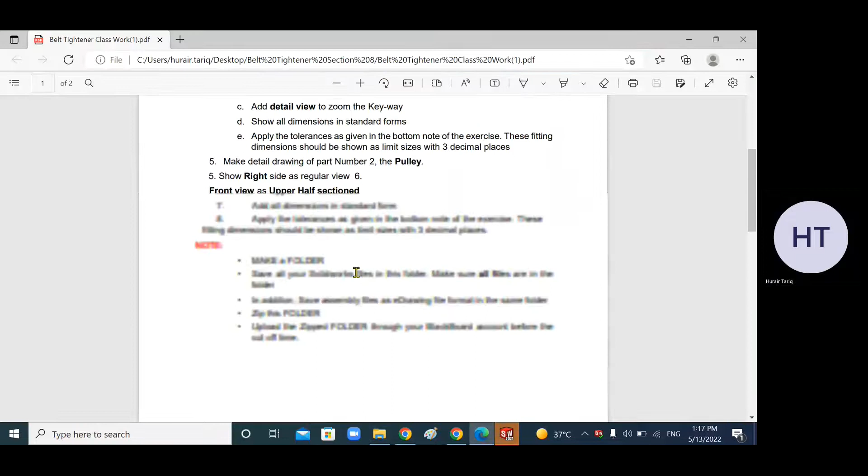Okay, so go to the assembly. Now, our part 1 is the frame. As you can see from here, this is part 1, which is the frame. So we want the frame to rotate about this bracket. So we do not want the frame to be fixed. Rather, we want the bracket to be fixed.

So this belt tightener is actually an assembly in which this frame rotates about the bracket. And when the bracket rotates, all the pins and everything are going to rotate with the bracket. This pulley is going to rotate as well. So we are going to bring this bracket first, because we want to make it fixed. Bracket is actually our part number 3.

So we are going to bring part number 3 first of all. So there it is, in SolidWorks. So go to the assembly now, browse.

You can go to assembly, insert component, browse, and we will go to the desktop, and we will come here to the desktop, to the belt tightener folder, and then over here we have this part number 3. We will bring this part first.

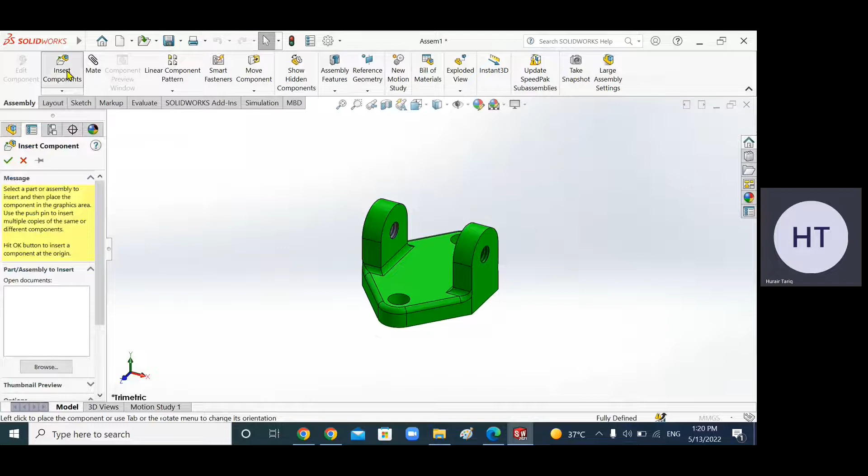So this was actually the first part. Now we are going to bring the rest of the parts in. So insert component and click on this part first: 1, 2, 4, 5, 6, 7, 8, and 9. Click open and bring all the parts one by one. This is first, this is second, this is third, this is fourth, this is fifth, this is sixth, seventh, eighth. Okay, all 8 parts are brought in.

Now we need 2 more, what is it called, 2 more pins, because we need 2 pins and 2 washers. So we are going to bring part number 6, which is the pin, and part number 4, which is the washer, again. Okay, this is part 4 and this is part 6.

The orientation is not correct anyway, but it doesn't matter, we will flip it when we do the assembly. Now we have to see how these things are joined together. First thing is that we are going to fix this wheel, this pulley, with this frame. Okay, you can start from anywhere you want, it depends on you.

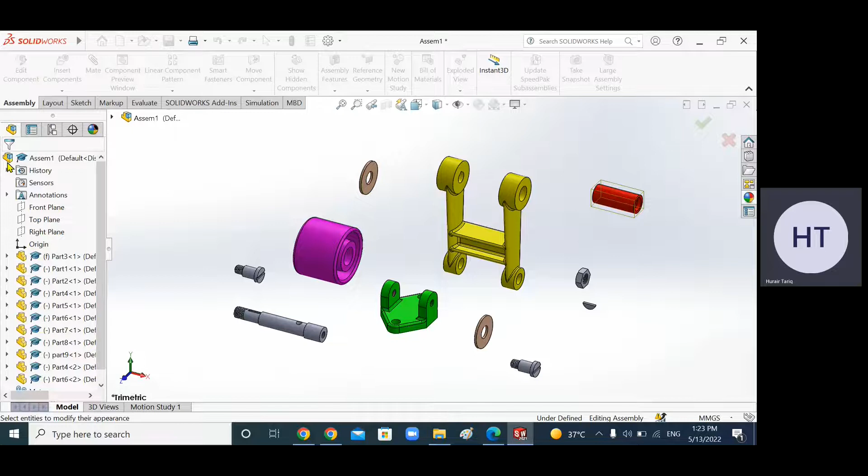Now what we'll do is bring this pulley over here, and we will click on mate, and we will click on this circle. Do not select the face, we do not want to select the face. Click on this circle and this circle over here and make it concentric. Okay, so this is concentric.

Do not lock the rotation, because the pulley is going to rotate with respect to the bushing. If there is a clearance fit between the pulley and the bushing, then you cannot lock the rotation.

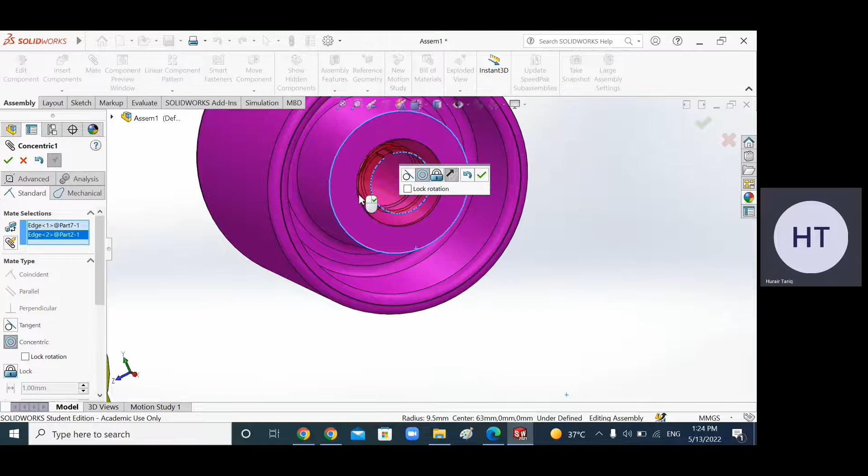If there is an interference between the pulley and the bushing, then you can lock it. But normally there is an interference fit between the pulley and the bushing, and you can see this is the oil channel. So over here you will have the interference fit. Normally we do have the interference fit here, and between the shaft and the bushing we have the clearance fit, so we can lock the rotation.

We can lock the rotation because we know that there is an interference fit between the pulley and the bushing, because there is no oil channel on the outside, but there is oil channel inside. So when you have an oil channel, this means that the two mating parts have got the clearance fit, not the interference fit.

So I have locked rotation, so it's not going to rotate. Click OK, but this can come out. This part can come out, as you can see. So what I have to do is apply another mate.

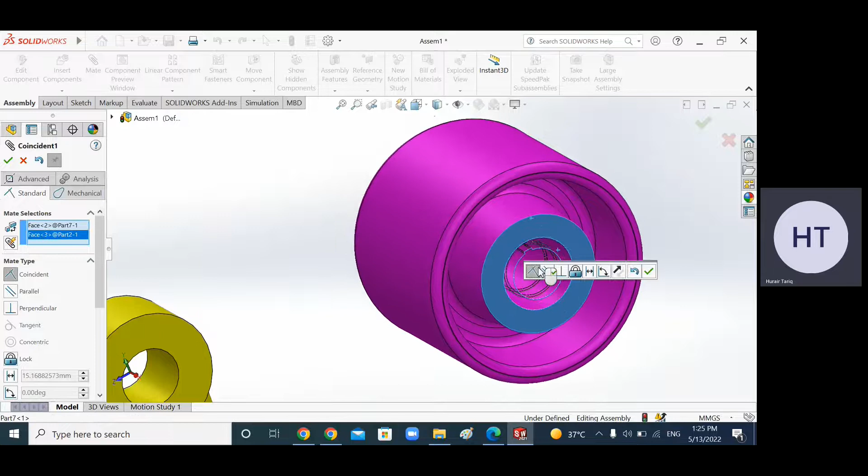I have to click on this surface and this surface, and I know that they both have the same depth - the depth of the bushing and the depth of the inside hole of the pulley are the same. So you can choose these two surfaces and make them coincident. Okay, so now this is done.

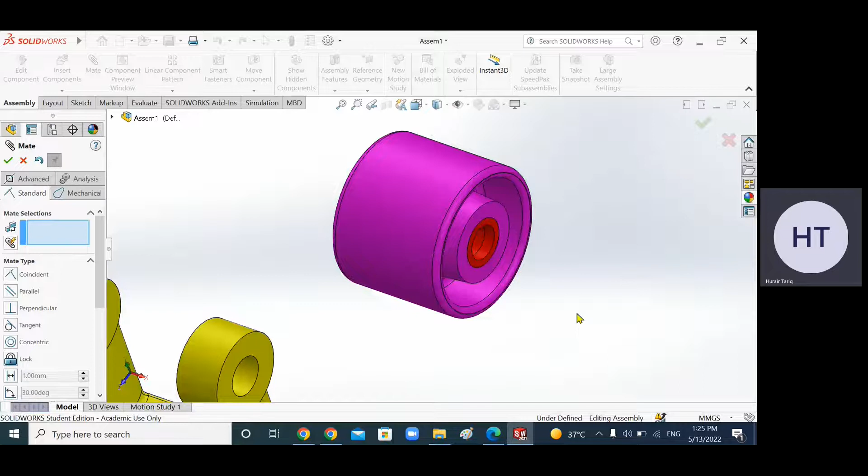Now what is the next thing? You have to place this pin inside this bushing, and how is it placed? Let's see what is the outside diameter. The outside diameter of this pin is, as you can see, 19. So the outside diameter is 19, and over here from this side it is 22. This is 19, this one is 22.

And what is the inside diameter of this bushing? It is 19. So we can see that this bushing is actually - this side, which is 19, is going to go inside this hole. This 22 diameter cannot go inside the bushing. So we can see this thing, but we are not going to do it right now because the pin is going to come first. We are going to place this inside and then we will place the pin inside.

First, we will place this bushing and the pulley inside this frame, and then we are going to do that. This is the next step. But before doing that, we have to place the washers. What is the thickness of the washer? You can see it's 3 millimeter from here, 3 millimeter from there. So 3 plus 3 is 6, and the inside length is 63.

So 63 plus 6 is 69. And you can see that 70 is actually the distance between the two faces, one face over here and one face over there. So the distance between the two faces is actually 70. So there is actually a 1 millimeter clearance between the two faces.

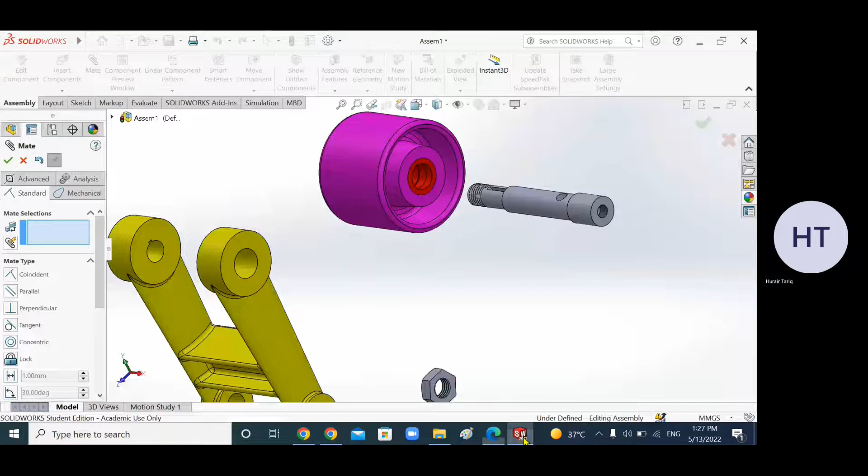First make the washers concentric. Okay, so click on the two washers. So you have this washer - first select this one, this edge, and select this circular edge and make it concentric. And you can unlock the rotation, because over here the washer is going to rotate - it's not fixed with the pulley. The washer is allowed to rotate, so you can unlock the rotation.

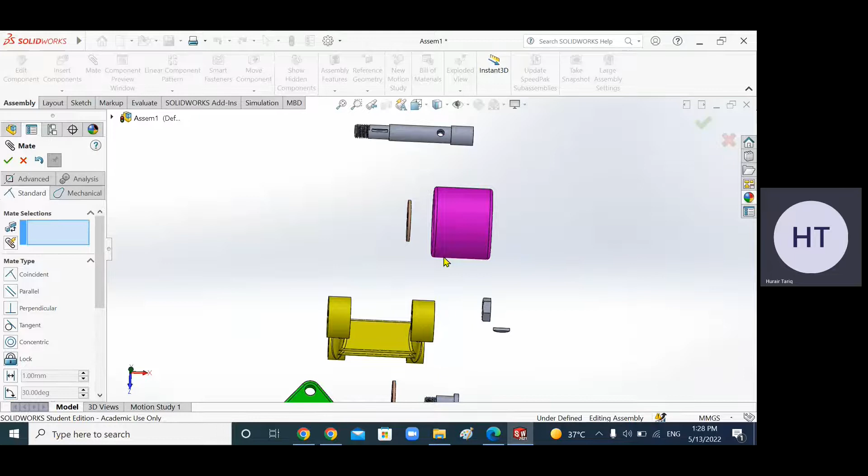This is okay. So you have another washer, but this washer can move. So what you can do next is click on this surface. Strictly speaking, I should apply a distance mate between this surface and the surface of the washer, but that distance mate is going to become very complicated, because this washer is actually allowed to move like 0.5 millimeter in this direction, and the other washer is also allowed to move 0.5 because there is a 1 millimeter clearance.

But we are not going to go into that detail. Just click on this surface and this surface and make it coincident. That is also acceptable. Similarly, we can click on this surface and this surface over here and make it coincident. That's fine. This is the first relation.

And then, okay, done. We have this edge and this edge - sorry, the surface is selected. Delete this surface because the surface is selected. I'm going to select this edge, the edge over here - you can select any edge. Why is it not selecting? Is it already selected? No. Okay, so we are going to select this edge and this edge, not this surface.

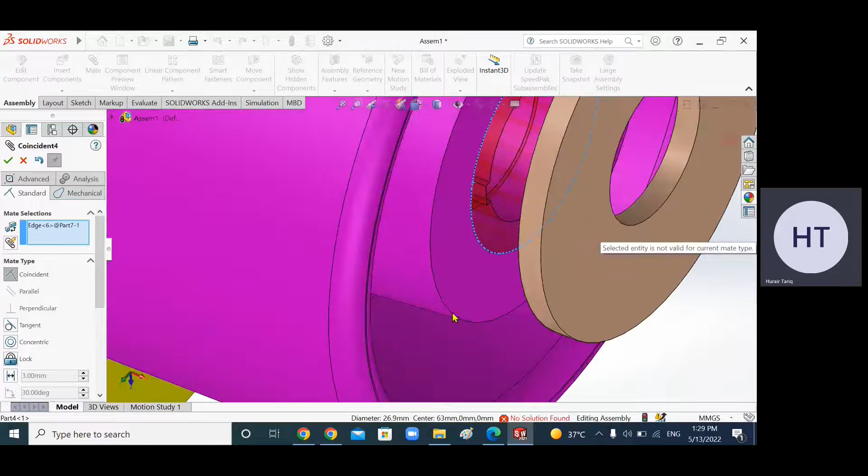Sometimes when you have a sloped surface connecting with the circle, it causes trouble with the surfaces. In this situation, you can select the inside surface of this one and the inside surface of this one and make it concentric. But it's not happening. Anyway, we'll see what the problem is.

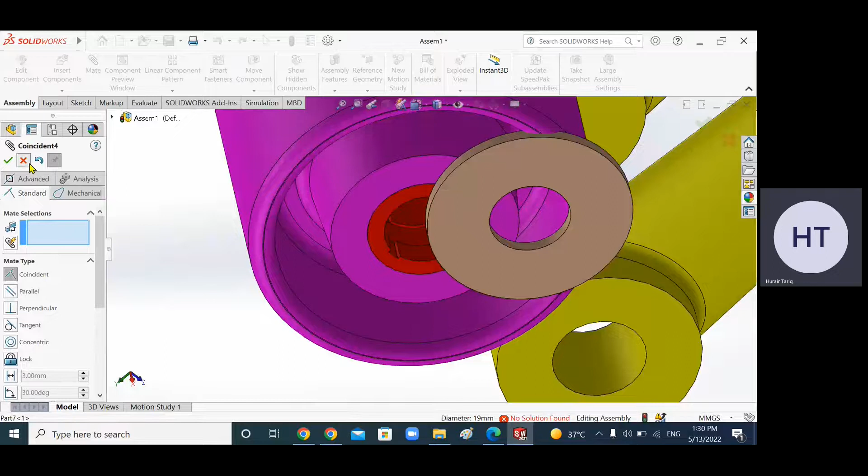It happened for the previous washer, but it's not happening over here. What we can do is break the previous mate. Let's break the previous mate. First of all, delete this mate.

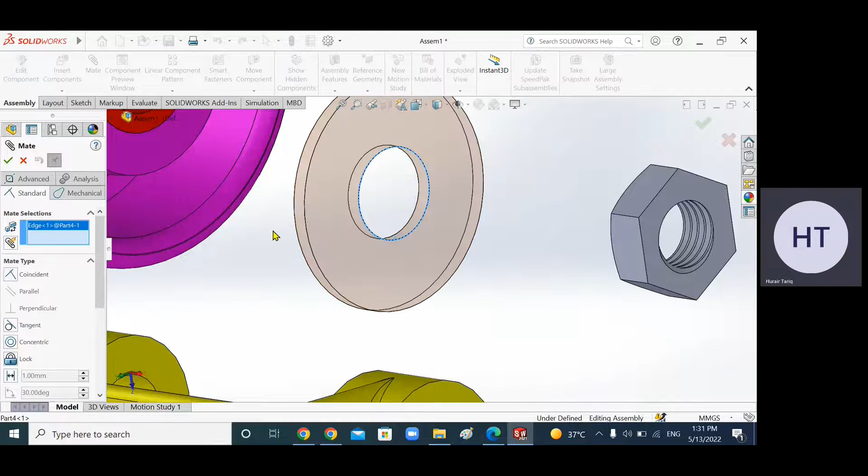Let's make the concentric mate first. So we have to make the concentric mate first of all. Go to mate. This one is there. Where is it gone? Not point, anyway. Where is the polygon? Washer, washer is there.

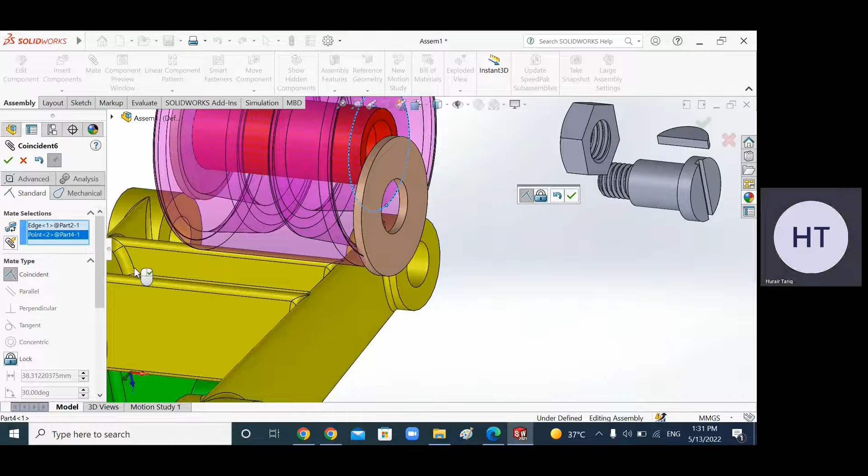Now this is the problem. When something is not fixed, it moves all around. Okay, so go to mate again. Click on the edge over here and click on this one. No, I'm trying to select this one, but it's not working. Anyway, what other option do I have?

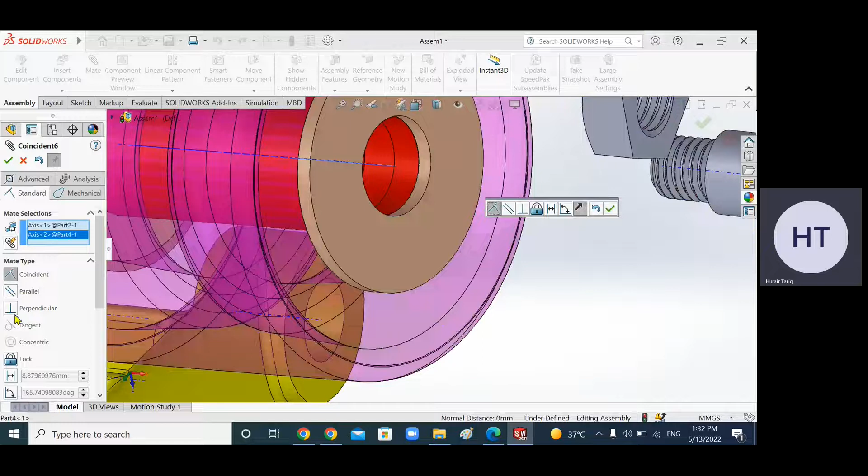I can go to this axis, view axis, and try to select these axes. So this axis is selected, and there is an axis over here which I'm going to select. Now make it coincident, that's the option. I don't know why it happened for this one but not for the other. Anyway, now it's coincident because I made the two axes coincident, which means the two circles are concentric.

Now what I will do is click on this side, click on this side, and make it coincident. Now this is coincident, and four parts are assembled together. Now we are going to bring all four parts over here. We can place all these four parts over here.

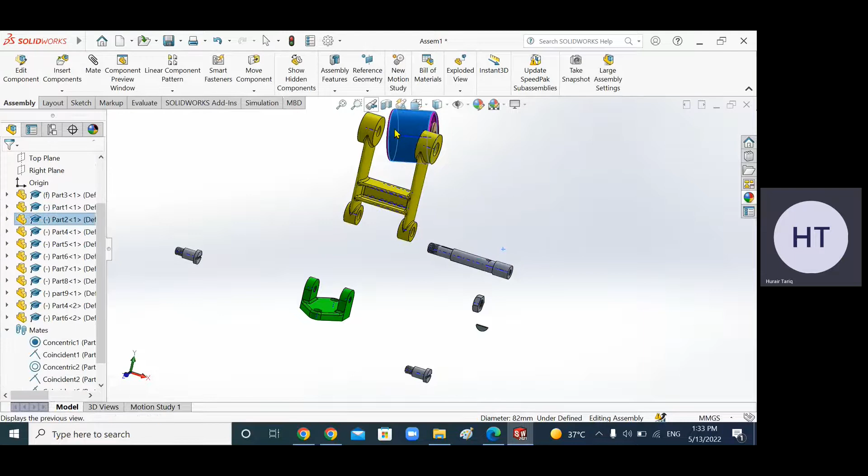Move it over here and click on mate, click on this circle and the circle over here—which face is selected? Yeah, there it is, the circular edge is selected. Make it concentric and do not lock rotation. Now this can move inside, it's concentric and can move inside and outside.

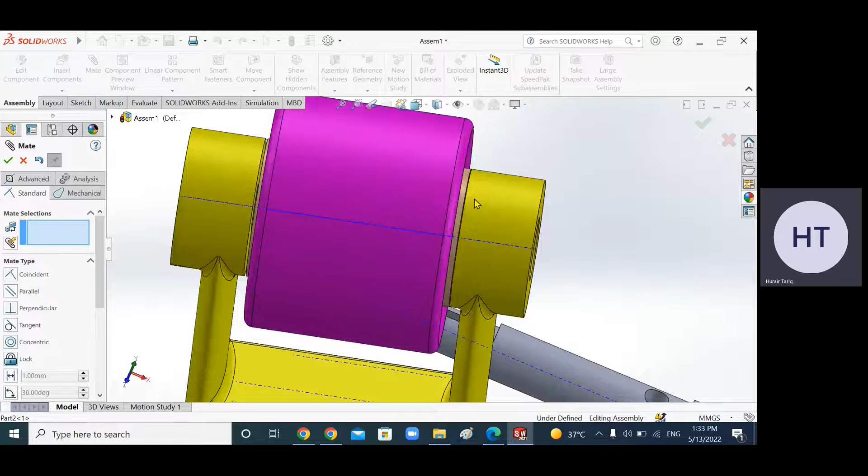Now we have to apply this: we know the distance from this surface on the frame to the other surface is 70, but the distance from the outside of one washer to the outside of the other washer is 69. So there is actually a 1 millimeter gap, as you can see. The gap is already there on both sides, and the sum of these two gaps is actually 1 millimeter. This pulley is allowed to move within this gap.

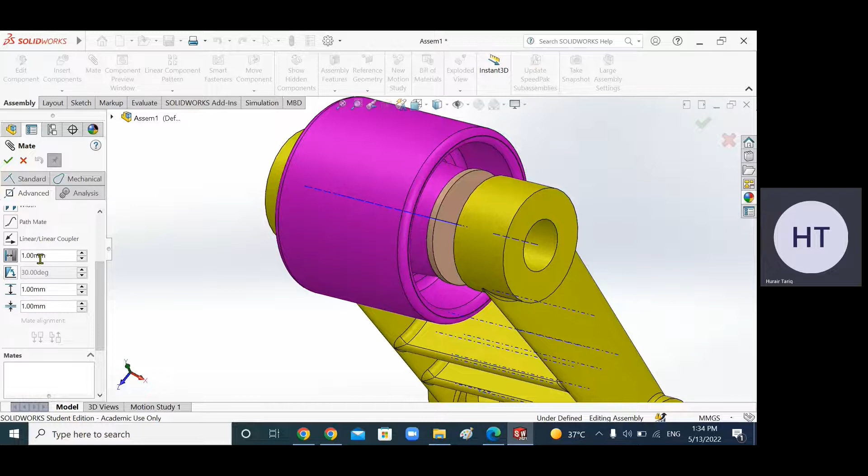So what I'm going to do is apply a distance mate. Go to mate, then advanced, and there's an option for distance mate. Remember, this number is nothing—it just tells you the present position. Now I want the minimum distance between this surface and this surface.

I am going to first select the two surfaces with respect to which I want this distance mate to be. So the first surface is this one and the second surface is this one. I want the distance mate between these two surfaces.

Now when I say 1 millimeter, it becomes 1. When I say 11 millimeter, it becomes 11. This number tells you the present position—it has nothing to do with the mate. You are not going to define any angle between the two surfaces.

Now I want the minimum distance to be 0. What does 0 mean? It means the two surfaces are coincident. And the maximum—this symbol is for maximum—maximum is 1 and minimum is 0. So you can enter 0 here. Maximum is 1 and minimum is 0, and click OK.

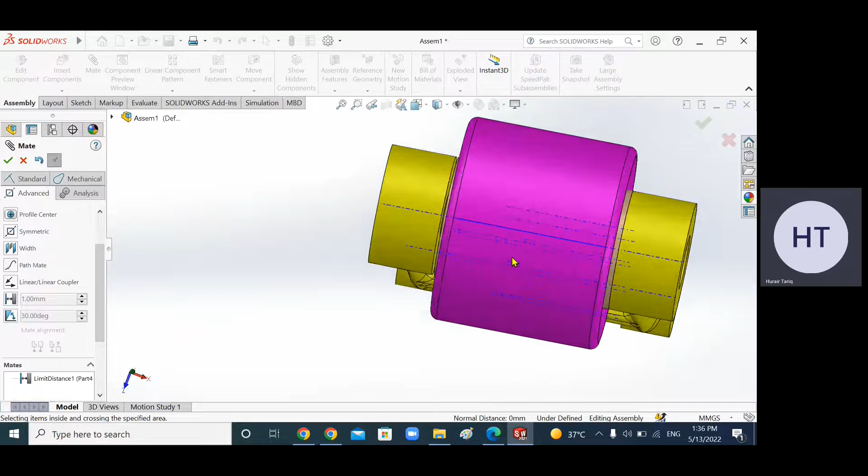When you click OK, you can see that if you bring it in front view, that's not actually the exact front view. The front view is with respect to this thing, which is already rotated, so it's not going to be in the exact proper position. But you can see that you can move it within 1 millimeter distance, because I have applied a mate over here. So the minimum is going to be 0, maximum is going to be 1. This pulley cannot go outside this.

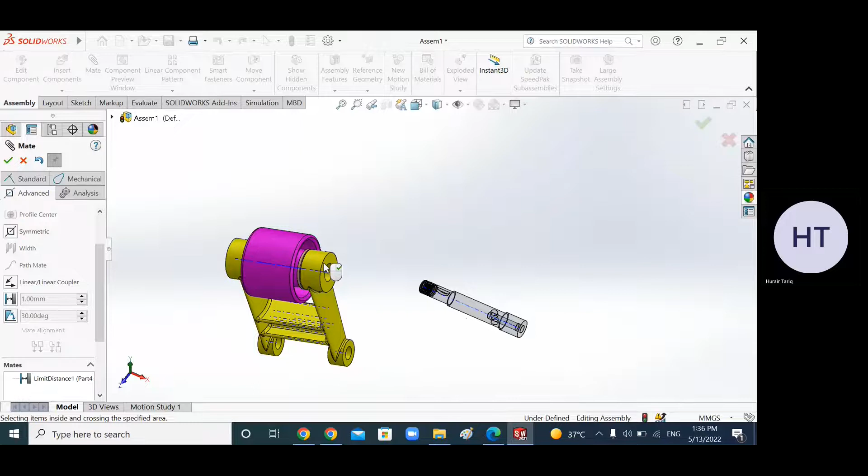Now what is the next thing? I have to put this whole pin inside this. For easiness, if you think that this part is rotating and you are unable to do it easily, here's what you can do.

Go to frame 1. Where is frame 1? This is part 1, which is actually frame 1. Left click on it and click fix. When you click fix, you can see that it becomes F. For the time being, we are going to make it fixed, but after we have inserted all the parts, we can unfix it, because this frame is actually going to rotate about the bracket. So for the time being, so that it doesn't rotate, when it's fixed, it's not going to rotate, and you can place your pin easily.

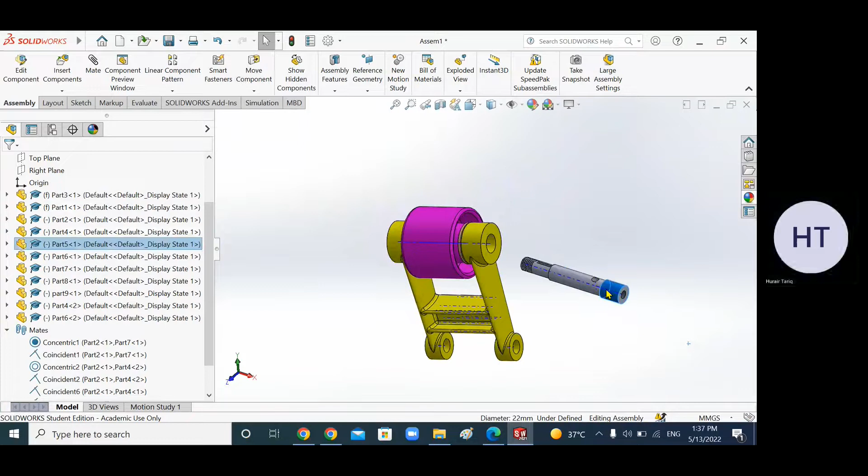Inside the frame, see how the pin is placed. This diameter is 22 and this diameter is 22 as well, so the 22 portion is going to go inside this 22. And what is this length? This is 25, this is 25, and this is also 25, meaning this portion is going to go completely inside this. Then you have a diameter of 19, as you can see, and this 19 is going to go inside this 19 millimeter bushing.

So what I will do, you can change the color of the pin if you do not like it. I want to make it colorful, so let's change this color and make it green.

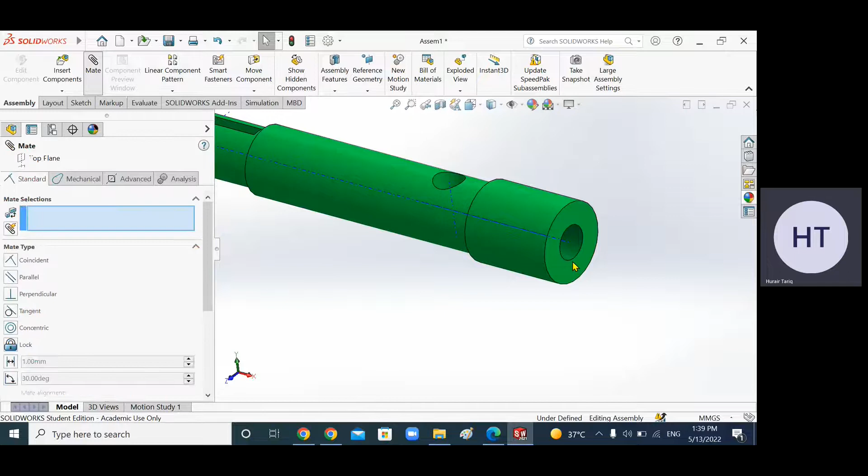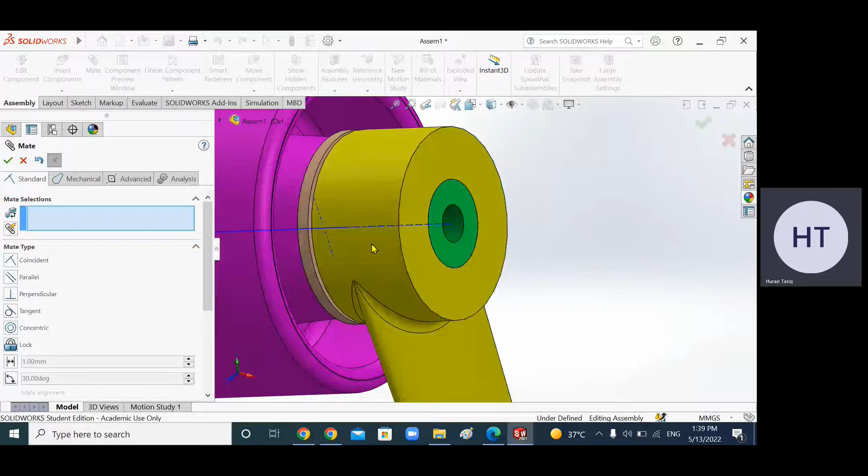I know that this diameter is 22, this hole diameter is 22, this length is 25, and this is also 25. So I'm going to first make it concentric. Insert mate, click on this circle and this one, make it concentric — that's the first thing. Then click on this surface and this surface and make it coincident, because we know this 22 diameter hole and shaft have a length of 25 millimeters, so this 25 is going to come here. As you can rotate this, now this is coming on the other side.

Now you have to place a nut over here. Where's the nut? This is the nut.

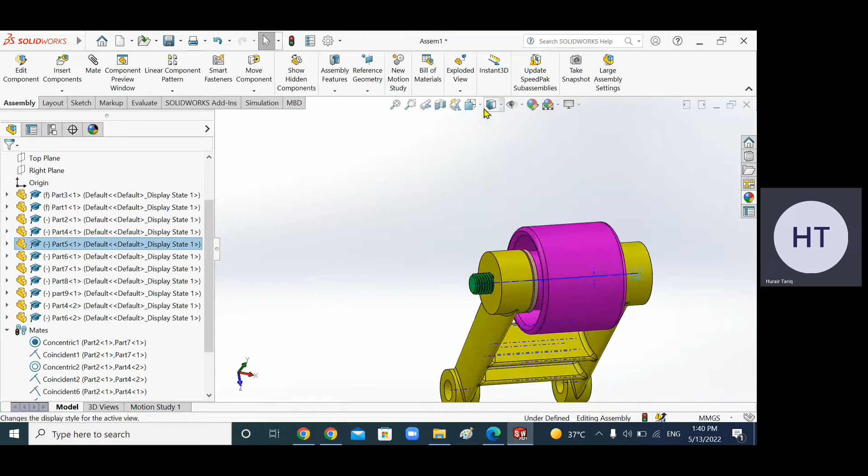One thing I forgot — I forgot about the Woodruff key. And one more thing you should notice is that this shaft can rotate, as you can see, because I haven't locked the rotation. So I have to place the Woodruff key inside, which I forgot. Let's see where the Woodruff key is going to come.

I should have done it before, but okay, let's see where the Woodruff key is going to come. One part of the Woodruff key is here and the other part is actually there — so here is the Woodruff key. When I was inserting the shaft, I should have placed the Woodruff key inside.

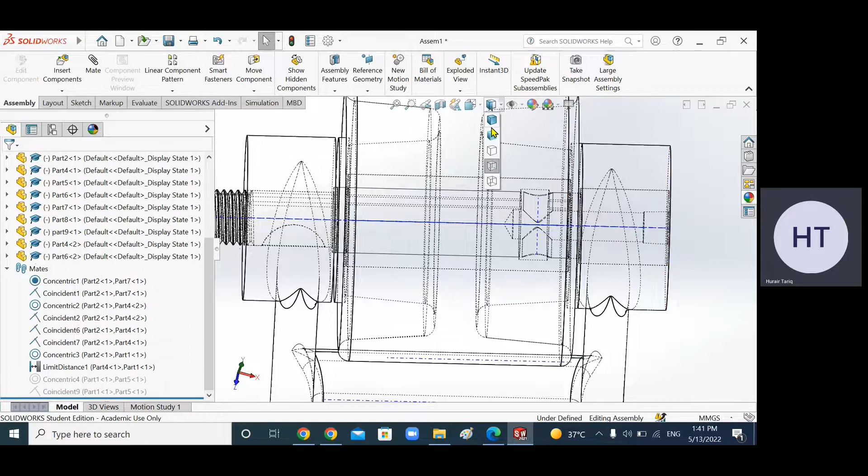What we are going to do is suppress these last two mates. Suppressing mates means these mates are now inactive. When you suppress these two mates, you can bring the shaft out. The advantage of suppressing over deleting is that when you suppress, you can unsuppress as well, but when you delete, it's permanently deleted and you cannot undo it. So it's better to suppress when you see these types of issues. So what do you think — where is this Woodruff key going to come? This Woodruff key is going to come over here actually, I can rotate this.

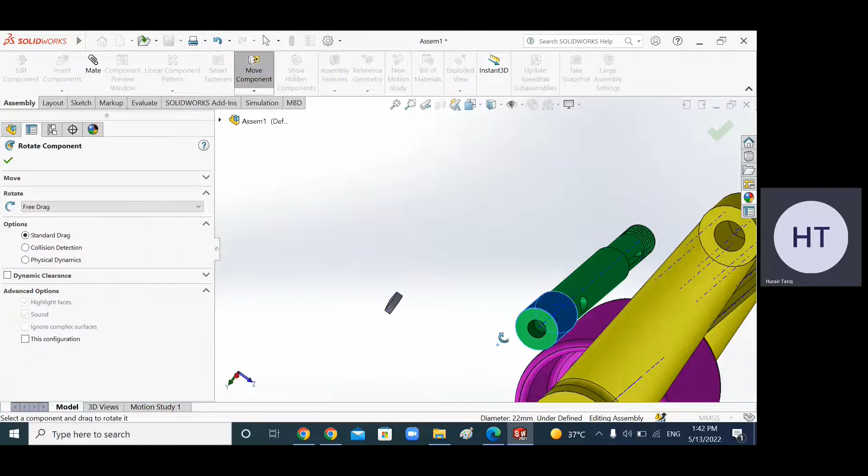Where is the option for rotation? Move component, then rotate it. Okay, rotate this thing so that you can see this portion at the top.

Now I will bring this Woodruff key over here and change its color, because we have to do two types of mates for the Woodruff key, and we want it to be visible while we are making the mate. Change its color to something like purple, so that we can easily identify the Woodruff key. So there is the Woodruff key. Now this is the axis of the Woodruff key.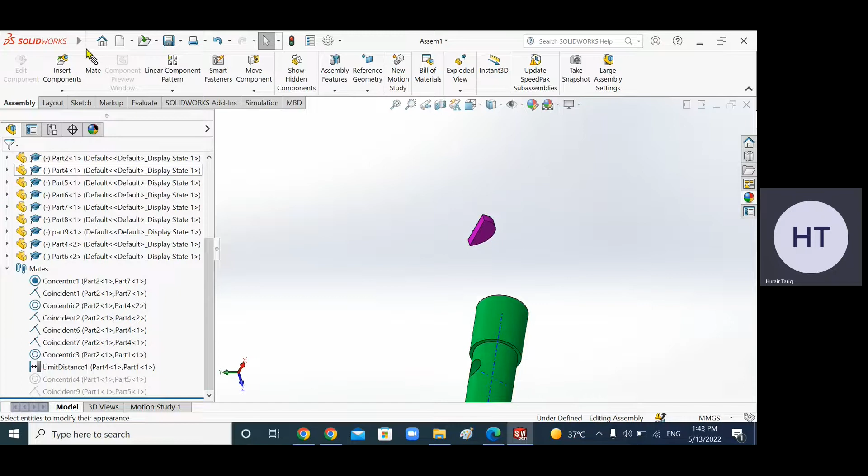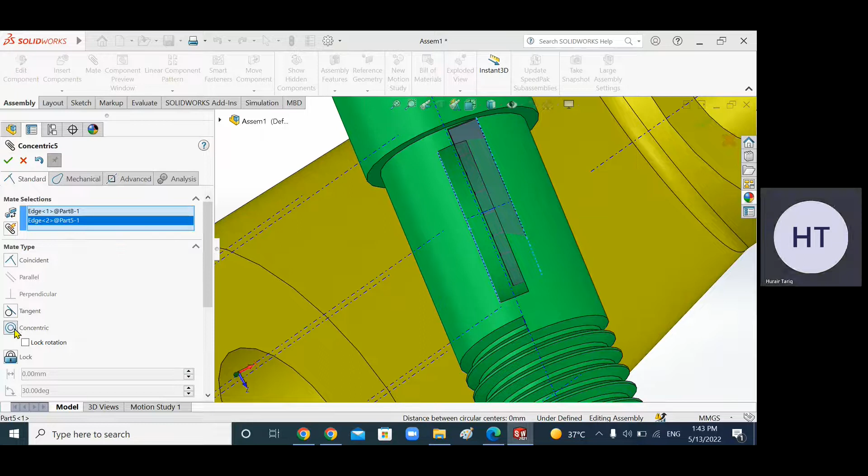So the two axes are, or you can select the two circles. Go to mate, select this circle, and select this circular surface which is inside, this one, not the face actually, no, this circular edge. There it is. Make these two circular edges concentric, not coincident. Concentric. When you make it concentric, this means the two circular surfaces are concentric.

Now we are going to make the two faces coincident, this one over here and the face over here. Now you can rotate the Woodruff key. When I'm trying to rotate it, it's not rotating. What you can do is fix this one as well for the time being.

So which part is this? Let's check it from here. This is actually part number 5. Fix this one for the time being. Okay, fix it, and now this is fixed. Now it's not rotating. Now you can rotate this, so you can see that it is actually

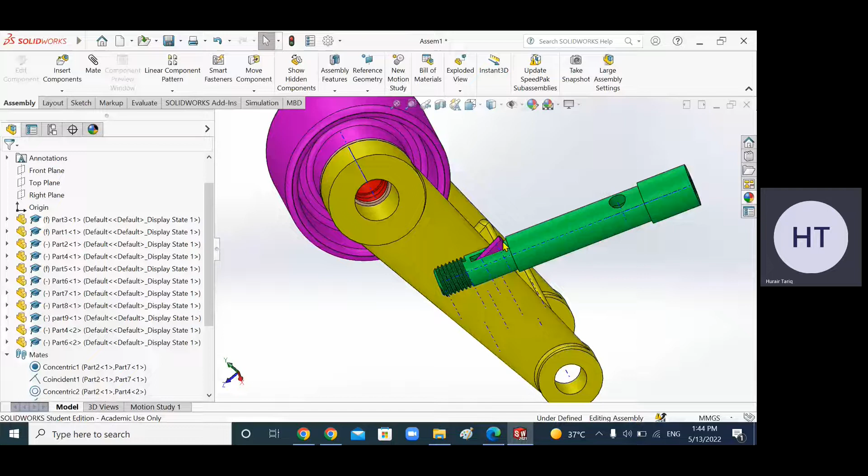concentric, and this surface is coincident, as you can see. But this surface should be parallel to this top surface, or we can say that this edge, the edge over here, the edge of the Woodruff key, this one. Yes, is the edge selected? Yes, it's selected. I don't know which edge is selected, but I'm going to select this edge, this one. This edge is

parallel to, going to be parallel to the axis. So when you make the two edges parallel, this Woodruff key is now going to be straight. So I have selected this axis. Turn on these axes, remember, turn on both axes. These are very helpful when you are doing the assembly. So this axis, this edge and this axis, they are actually parallel, and click OK. Now you can see that the key is not going to rotate.

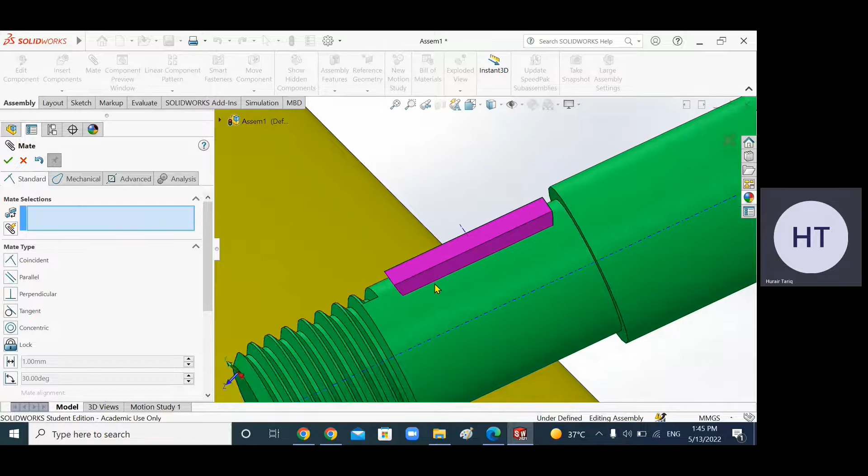Now this part is done. Now we have to make sure that this surface, which is actually over here, and the surface which is inside, this surface, these two surfaces have to be parallel, not coincident, because there is some gap between the two surfaces. So they are actually parallel. The parallel mate is actually very important in some situations.

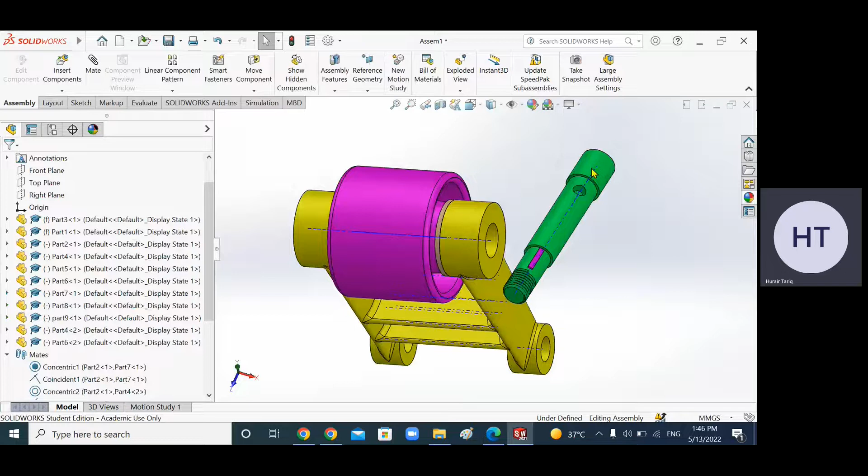You will find out that it's very important, but you will have to unfix this one. We fixed this, that's why it's not rotating. Click on this and make it float. Now you can rotate it, move it. Now make this concentric mate, unsuppress this. Now what's the advantage of unsuppressing this? When you unsuppress it, it's going to come in line.

Now, what I have to do, I haven't unsuppressed this one, because if I unsuppress it, then I will not be able to make the mate between this key and this surface. So first I'm going to make the mate and then I will unsuppress this last one.

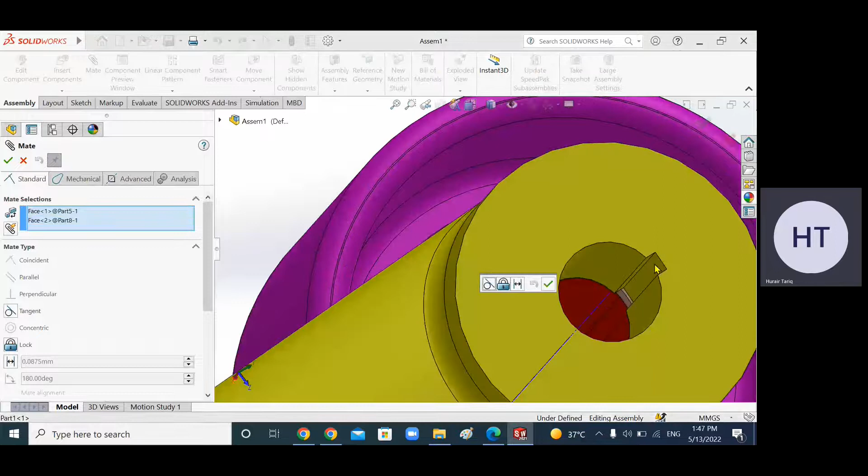So what I will do now is go to the mate, click on the top surface, this one, and click on the surface over here, which is this one. Oh, which face is selected, I don't know. Now you have to be very careful, okay, this one.

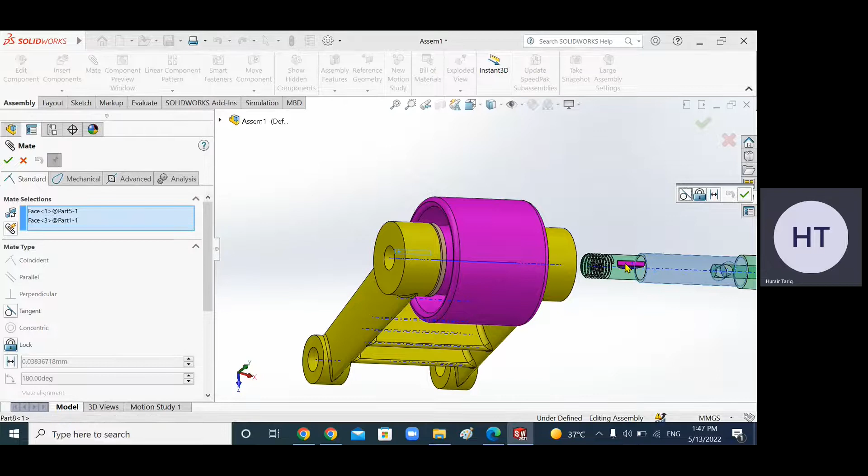Okay, so the two surfaces are selected. This surface is actually face 3 of part 1, and this surface is this one. If you do not know what this is, you can reselect it. Okay, this is face 2, so I selected the wrong surface actually. Now you can see that it rotated and aligned, and made it parallel.

Do not make it coincident. This mate is not going to occur. If I try to make this mate and click OK, it's going to give an error, saying to add this mate or break other mates, because we have made a concentric mate already. It's not going to happen, so we have to make it parallel instead. Now this parallel mate is going to occur.

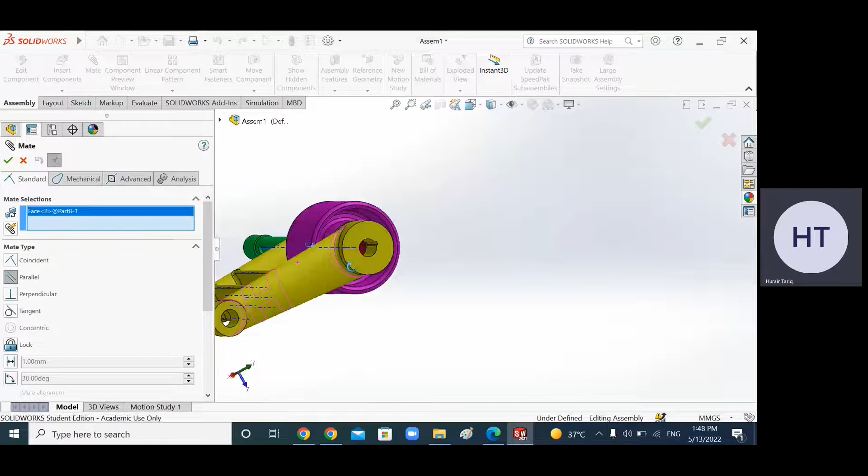Okay, let's do it again. It went away. So click on this surface, face 2, and click on this surface over here, which is actually face 3, and make it parallel. When you made it parallel, click OK. Now this is not going to rotate, even if you try to rotate it, because there is a mate between this surface and that one. So it's not going to go away.

Now what you can do is unsuppress this one. When you unsuppress it, this is going to go inside, and the Woodruff key is actually inside. If you make the section view...

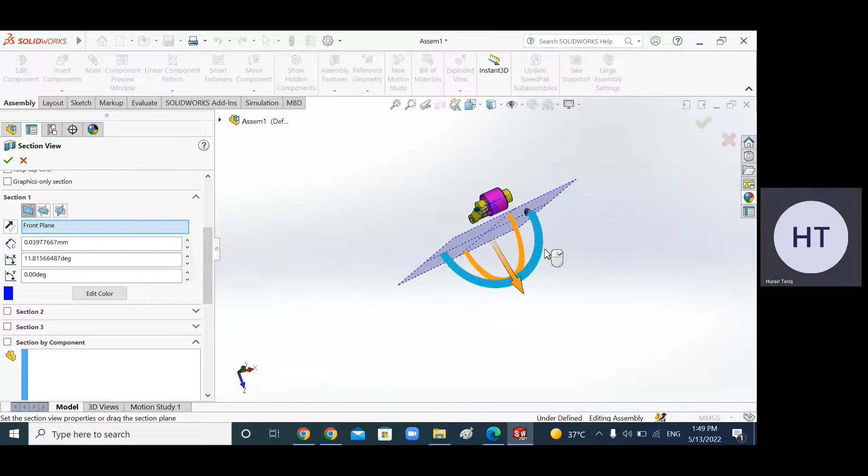Now when I make the section view, the orientation is actually wrong. This orientation of the plane is with respect to the bracket. I can change the angle if I want, but I will have to do some extra work.

Now you can move it inside, and when you go inside, you will see that there is actually a Woodruff key. So where is the Woodruff key? There it is, this one. This is the Woodruff key. So you can see that the Woodruff key is there. If I click OK, you will see the Woodruff key is actually at its proper place.

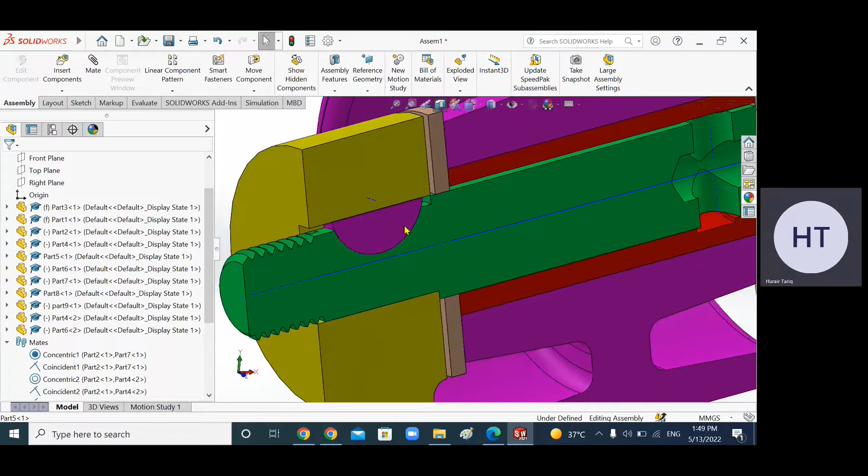So this was actually the slot which we made. Remember this slot - this is the cutaway model, but you actually have a slot over here. And because of this slot, if I turn this off, you can see there is a slot, and because of this the shaft is not going to rotate.

Okay, now we have done most of the work. Now only the nut is remaining. This side of the nut is going to come outside, and that nut is going to go inside. A very important thing - first of all, we are going to make a concentric mate. Click on the mate, unselect this, click on this axis over here, and click on this axis over here, and make it coincident.

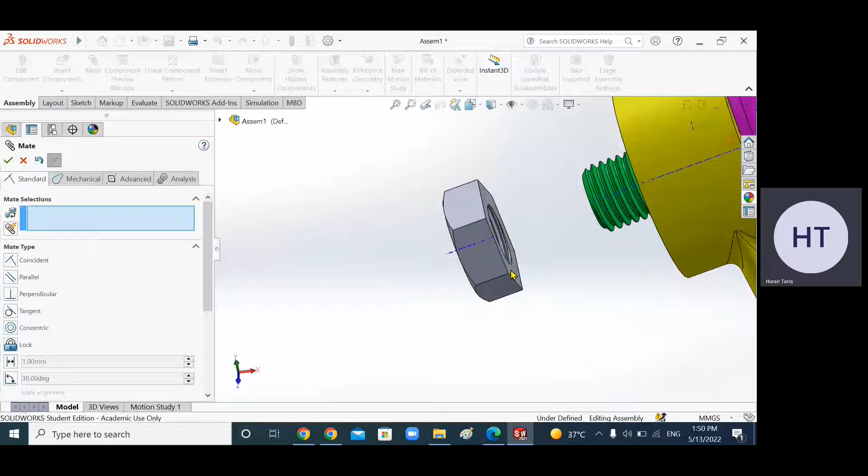Click OK. Now we are going to decide what type of mate we want for this nut. We want a screw mate. So go to advanced, not advanced, go to mechanical, and click on screw.

Now over here it's given as revolutions per minute. Revolutions per minute means - sorry, revolutions per millimeter, not minute. Revolutions per millimeter means how many revolutions it's going to make when it moves a distance of 1 millimeter while rotating in the screw. So remember, revolutions per millimeter is the same like teeth per millimeter.

You can say teeth per millimeter, but the number of revolutions per millimeter is actually going to be the number of threads, not the teeth - threads per millimeter. So it is same like TPI. If TPI is given to you, then you can choose this option, or TPM. In this situation it's going to be TPMM, actually not inch, it's in millimeter. So if threads per millimeter is given to you, then you are going to choose the top option.

But this distance per revolution is actually the pitch. Pitch is how much distance is covered when it is rotated one revolution, and it is going to cover a distance equal to its pitch if the lead is 1 - this is what we discussed in the theory as well. Now in this situation, if there is not a lead, if there is like a single thread, then the distance per revolution is going to be equal to the pitch, and in this situation the lead is going to be equal to the pitch.

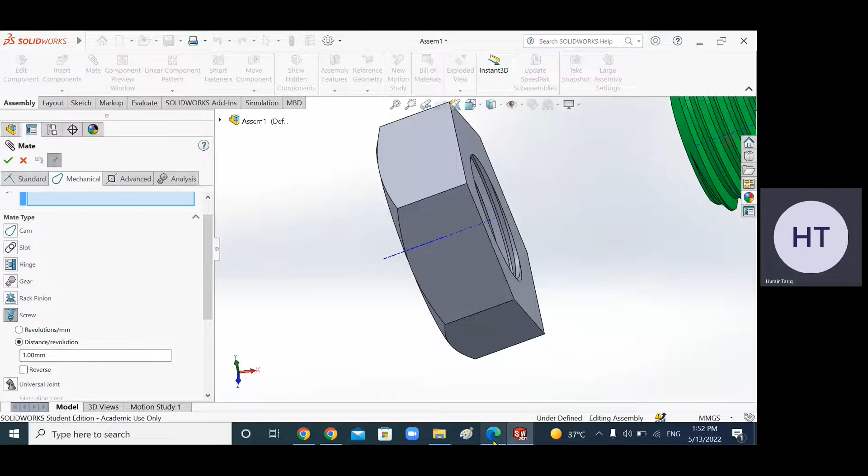Okay, so this is what we discussed in theory, but in our situation, because there is a single thread, the distance per revolution is going to be equal to the pitch. What is the value of pitch? You can see from here. The value of pitch is actually 2. Here it's written M16 into 2, so 2 is actually the pitch, and on the nut side it's the same, M16 into 2. So we are going to enter 2 over here.

So we will enter 2, and you have to be careful about the reverse. We will have to check it actually. Sometimes you have to check the reverse, sometimes you have to uncheck the reverse. It depends on the direction.

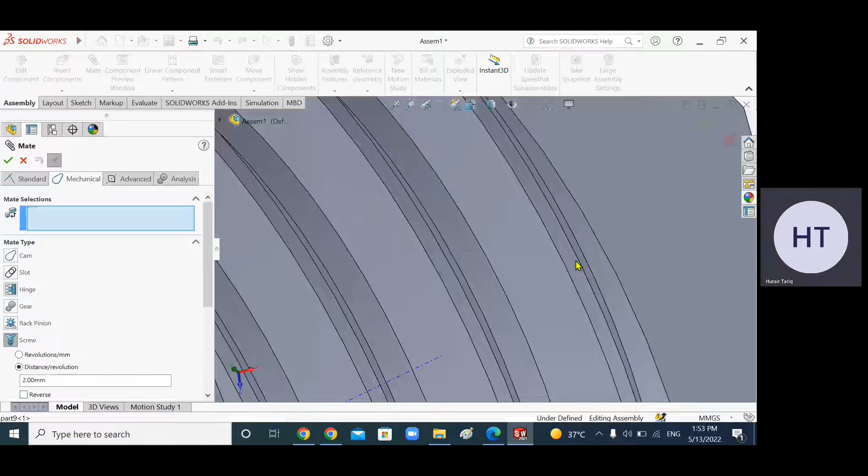So this is actually 2 millimeters, and select the surface in mate selection. In mate selection, you have to select the faces. Click here and select this surface, the inside surface. I'm going to select this inside. Why it's not selecting? It selected, but...

I want to select this face, this one. So this is actually the screw mate. Let's select this portion actually first, then this one. Let's do it again. I don't know what happened. Go to mate, click on mechanical, click on screw.

This is going to be 2 as we discussed, and in this one we are going to select this face. Selected entity is not valid for the current mate type. Why is it not valid? Let's select the axis, this axis, and let's select this axis, the axis of this one. So two axes are selected, and let's click OK.

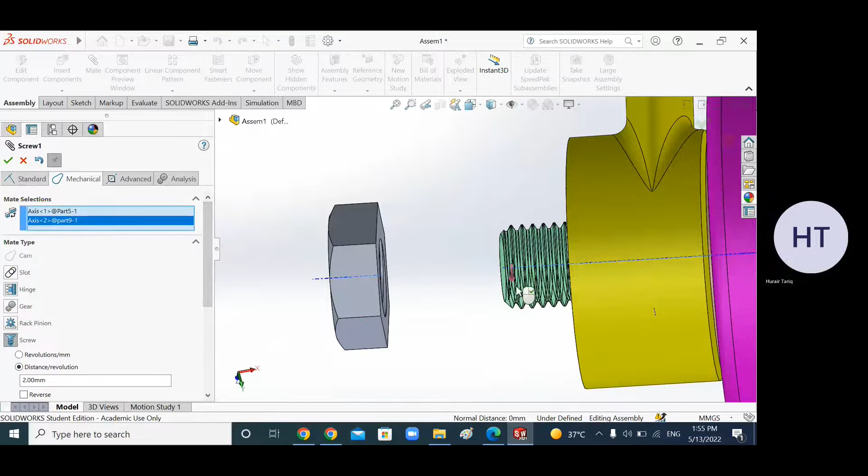So it turned out to, it again turned to 1. So you have to make it 2. You have to make sure that this is 2. Now we have to see whether this is okay or not. Let's uncheck it and see. The two axes are selected, and click OK.

Now try to rotate. Now when I'm rotating it, how it is going? Look, it is traveling. When you are rotating one revolution, it's going 2 millimeters inside. But we know that this thread is what? It's a right hand thread. And the property of the right hand thread is that when you rotate clockwise, it goes inside, isn't it? When you rotate clockwise, it goes inside. But in this situation, when you are rotating anti-clockwise, it's going inside.

This is not correct. So what we will do, we will reverse it, because we want that when we rotate clockwise, it goes inside. Look, right now I'm rotating anti-clockwise and it's going inside, anti-clockwise from where I'm doing. So I want that when I rotate clockwise, it goes inside. So I'm going to reverse it. Reverse it. Now look what's going to happen. When I rotate anti-clockwise, it's going outside.

So when you reversed it, now this is the correct thread, but the thread is actually going inside, as you can see. So what we are going to do, we have to limit it. We have to limit it. So what we can do is that in this situation, we are again going to go to this...

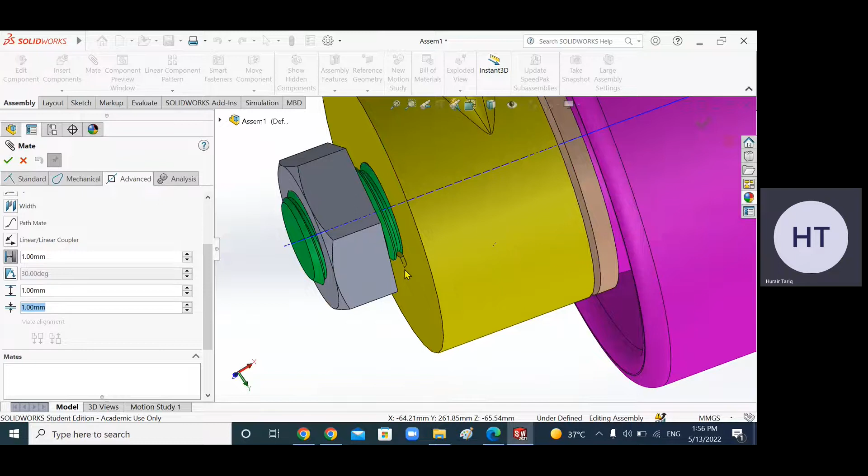Advanced mate, and this option distance mate, and the minimum distance what we are going to describe between these two surfaces, this surface and the surface over here, I'm going to describe the minimum distance to be 0. 0 means these two surfaces are close to each other, and the maximum, now it depends what maximum you want to define. For example, I define the maximum to be like this surface and this surface become same.

So we have to go back to the drawing, and we can see that actually this thread length is, how much is the thread length? What is this total distance? This is 134, as you can see. The total length of the pin is 134. And from this side to this side is 120. This is 120 and this total is 134. So this means this is 14 millimeters out, isn't it? So from here, because we know that, okay, let's explain to you again. The length of the pin is 134 and the distance from this surface to the distance from, okay, just give me a minute.

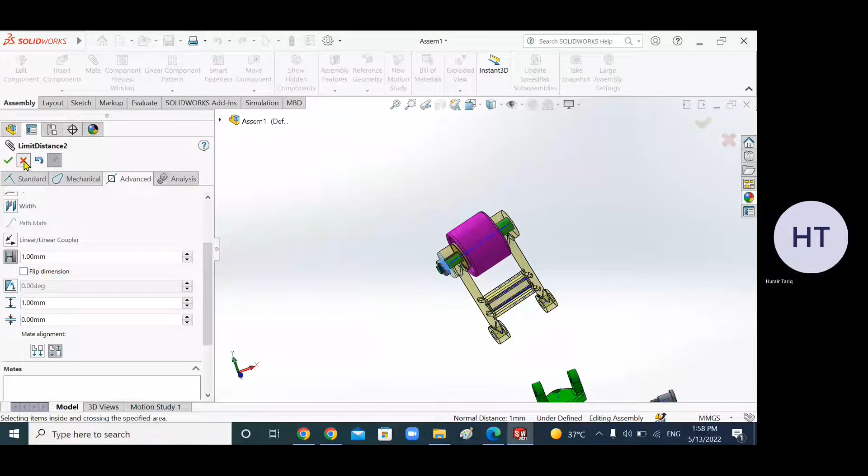The length of the pin is 134 and the distance from this surface to this surface is 120. So the pin is actually 14 millimeters out, isn't it? It's 14 millimeters out. Now let's see what's the thickness of the washer. If I come back here, you can see that the thickness of the washer is 9. So 14 minus 9 is 5.

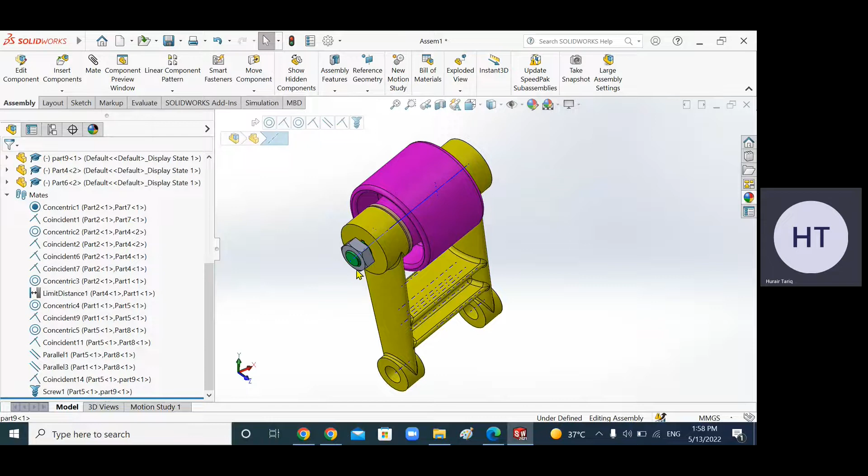So if I make the maximum distance 5 millimeters, this side of the washer will be coincident with this green side. This gray side of the nut will be coincident with this one. So the maximum limit I'm going to take is 5 and the minimum I'm going to take is 0. This is what I'm going to do.

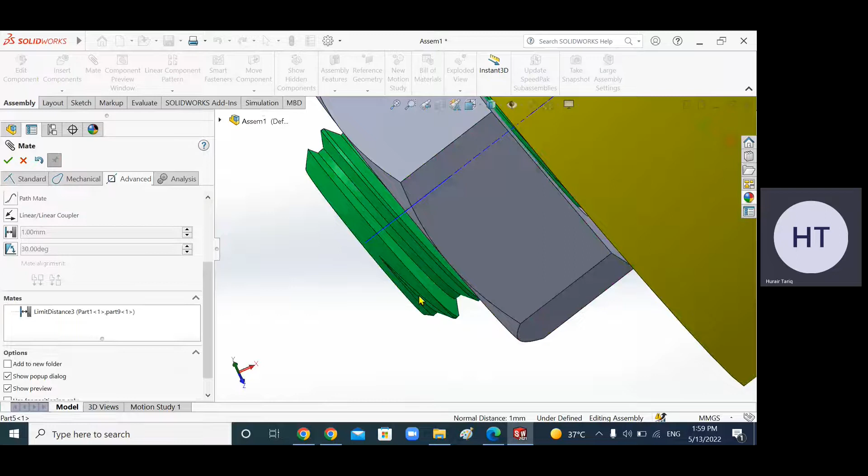So now let's come back over here, go to advanced, go to limit, select the two surfaces, one surface over here. Do not select the axis. Select the two surfaces, one surface over here and another surface on this side. Then I will say that the minimum distance is 0 and the maximum distance is 5. Click OK. When you click OK, what's going to happen if you try to rotate it in this direction, for example, click on one point and try to rotate it.

So it's not going to go inside. Look, it's not going inside. But when you try to rotate in the opposite direction, remember this is the right-handed thread. When you try to rotate in the opposite direction, no, look, it's not coming out. Because we have made a distance of how much? 5 millimeters. 5 plus 9 is 14. 9 is actually the thickness of the washer. So now 5 plus 9 is 14.

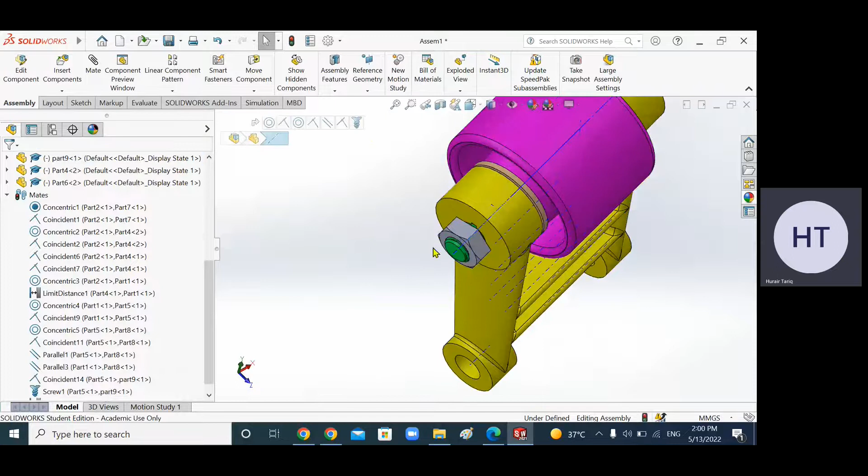Now this is okay. You can move this nut at the end. Make it at the end. Move it at the end. Now this is done. So now what is left?

This is left actually. So we have got two pins and we have to place everything inside the bracket. Remember, the first part is, now these two parts were fixed. I made this part fixed as well because it was getting difficult to insert the part. So I'm going to make this part 1, which is the frame, float. And remember, this bracket is always fixed. This whole thing is going to rotate with respect to the bracket. So we are not going to make this one float.

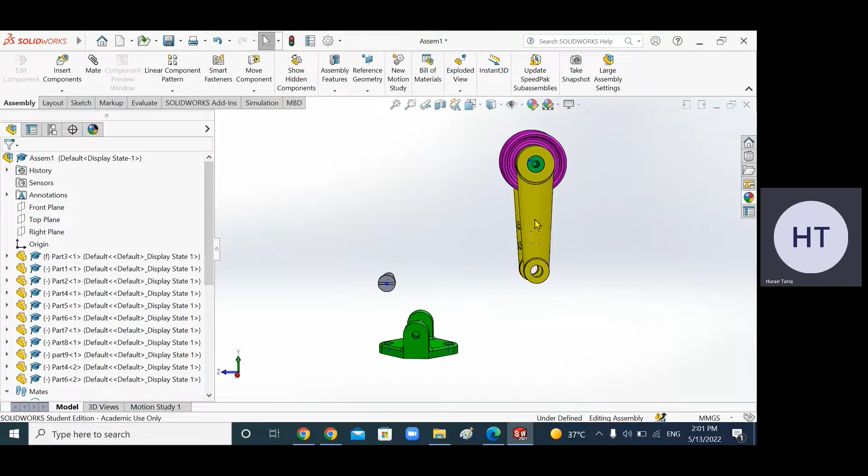And all the views which you see, front view, side view, they are actually with respect to the first part which you inserted. So you can see that this is actually the right view, but this is not the proper right view for this one because this is actually rotated. Now what we'll do, we are going to go to mate again, select this circle and this circle, and make it concentric, and do not lock rotation.

Now what is the next thing? Come back and see what is the distance between these two. Inside surface is 70. What's the distance between these two outside surfaces of the bracket? If you see from here, how much is the distance? Is there distance written? Yes, it's 70. You can see 70 written here. This inside is 70, this outside is 70. So there is actually no gap.

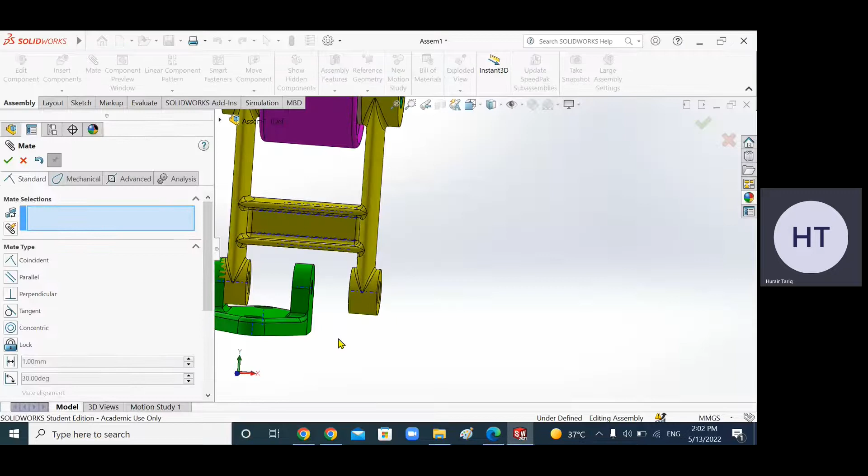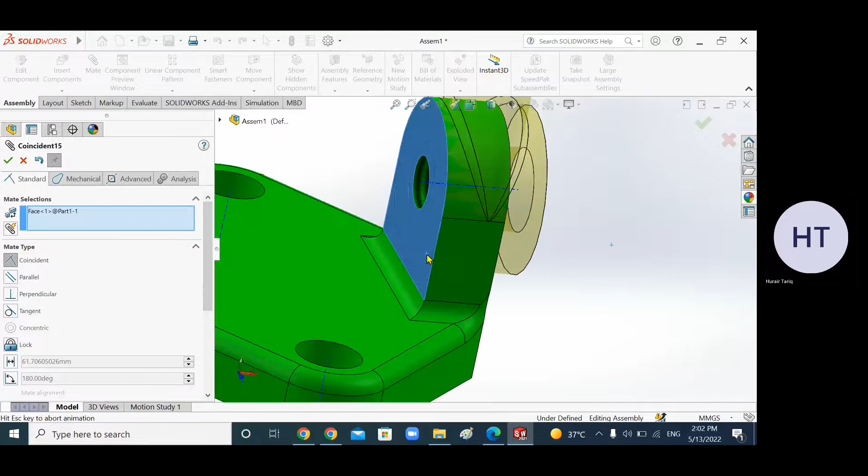So what we can do, we are going to select this surface and the surface over here. Where is that surface? Which surface do I select? Axis, sorry, axis is selected somehow. I have selected this surface and this surface. No, not this one, the outside surface, this surface. Now these two surfaces are selected, make it coincident and click OK.

So we have made a concentric mate and a coincident mate, and you can see that when I bring it in the isometric, it's going to rotate. This thing is rotating, and it should rotate actually. This is actually the belt tightener, it's like this. It always rotates like this, and the belt actually passes over the pulley. And this bracket is actually made fixed on some part.

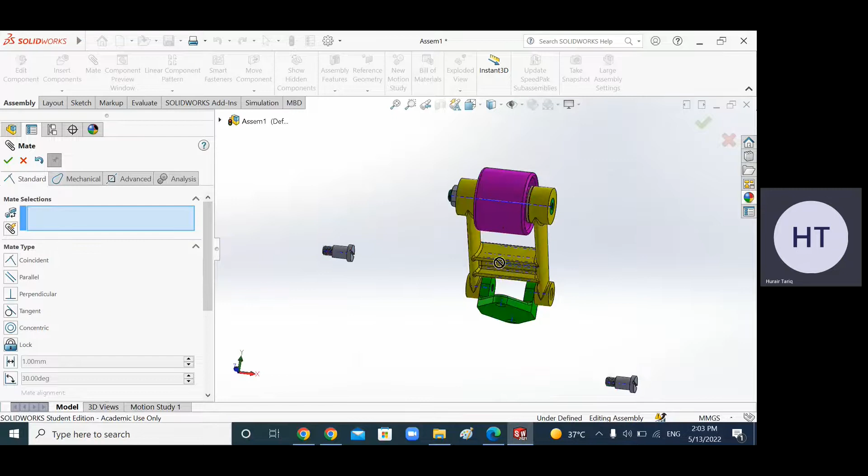Now I don't want that this should rotate and go all the way around. Of course, if you see, this is going to stop somewhere over here. This cannot go all the way around. This is going to stop somewhere over here when it touches this position. When this flange touches this surface, it's going to stop, isn't it? So it cannot go beyond, it cannot go inside. This is actually the maximum limit.

So what we are going to do, we are going to add a mate. We are again going to add a mate over here. First put the pins inside, then we will add the mate. Let's put the pin inside.

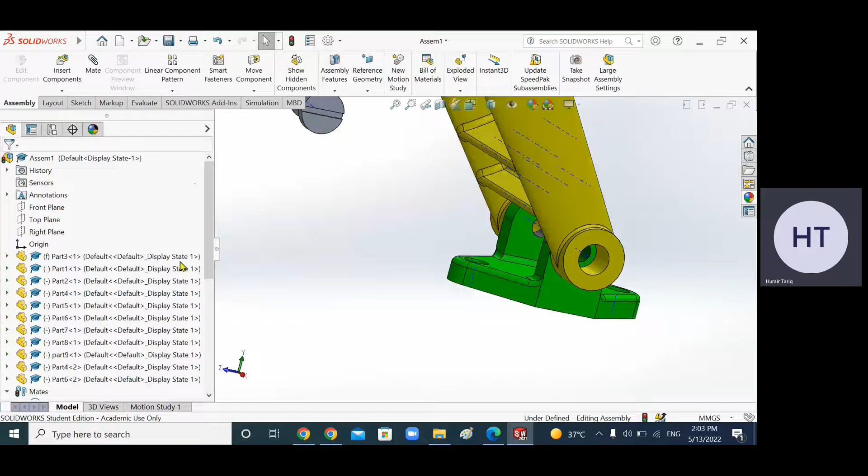First, go to mate. Click on mate selection, click on this circular edge and this circular edge over here, and make it concentric. Click OK, the pin is there. This is the concentric mate.

The second mate is a screw mate, which you have to make between this thread and the thread over here. Go back to advanced, and check the threads per inch. It's 1.75, as you can see, on this internal thread side and 1.75 on the external. Of course, they have to be the same.

Click on the two axes. This is the first axis and this is the second axis. Wait, we have to go to mechanical, not advanced, and click on option 2. The distance per revolution is 1.75 - we'll select it afterwards. Click on this axis, as you can see it's selected, and click on this one. This axis is selected too, and this is 1.75.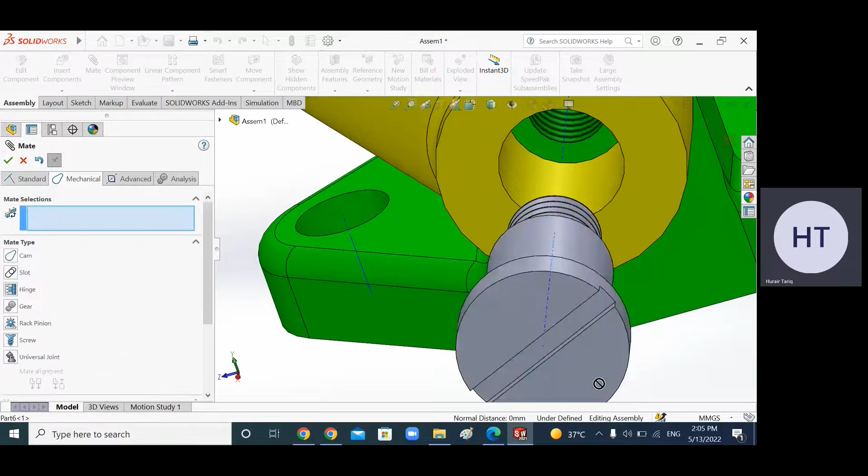Click on reverse, because reverse is for right-handed threads. For right-handed threads you always have to check reverse. Now click OK and you will see that the mate is there.

Now I don't know why the whole assembly is rotating. Let's fix it first of all. For the time being, let's fix it so that it doesn't rotate.

Now what I'm going to do is make a mate. I will come to this - this white part is my frame. So I will come here to the front plane of the frame. No, sorry, this is part 3, which is actually my bracket. I'm going to click on the front plane of my bracket. This is the front plane.

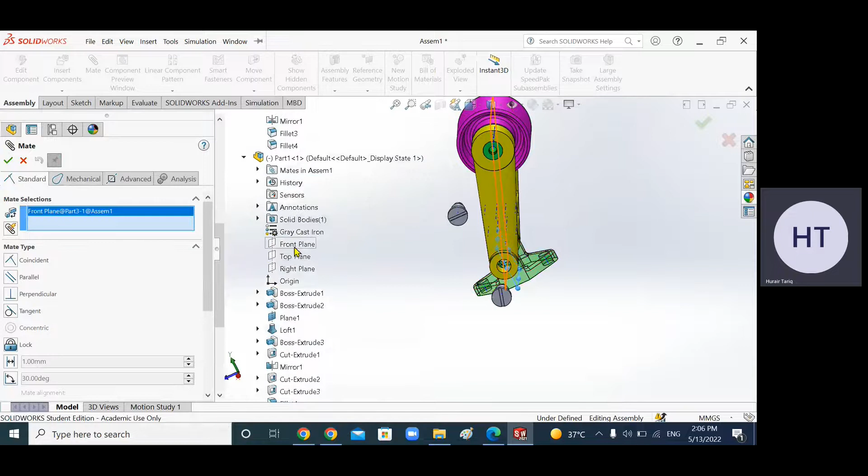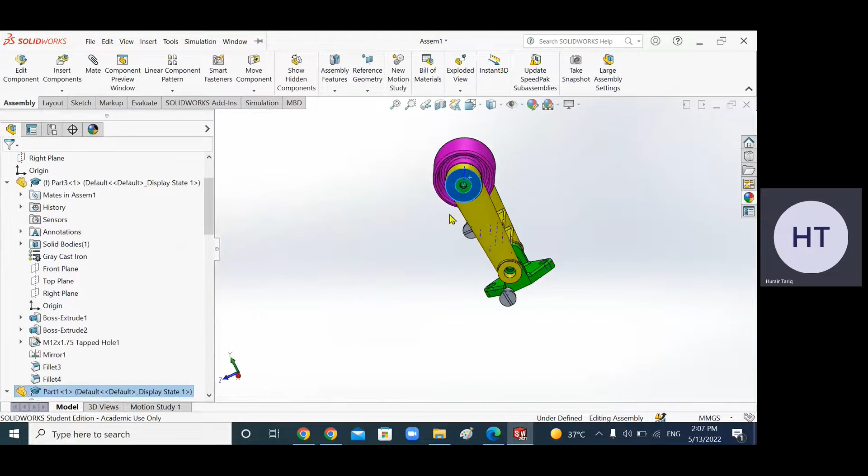And then I'm going to come to part 1 - this is my part 1. I'm going to come to the front plane of my frame, and what I will do is make them parallel. When you make the two planes, you could choose coincident as well, but parallel is a better option. When you click on parallel, now you will see it's not going to rotate because you've made the two planes parallel. Now if you try to rotate the screw, it's going to work.

So now it's going to work. How much is the pitch? The pitch is actually 1.75. It's moving very slowly, so you will have to do that - it's going to take some time.

Remember this is right-handed. It's moving 1 revolution per... Okay, what we can do is suppress this one. Suppress this and move it inside, close.

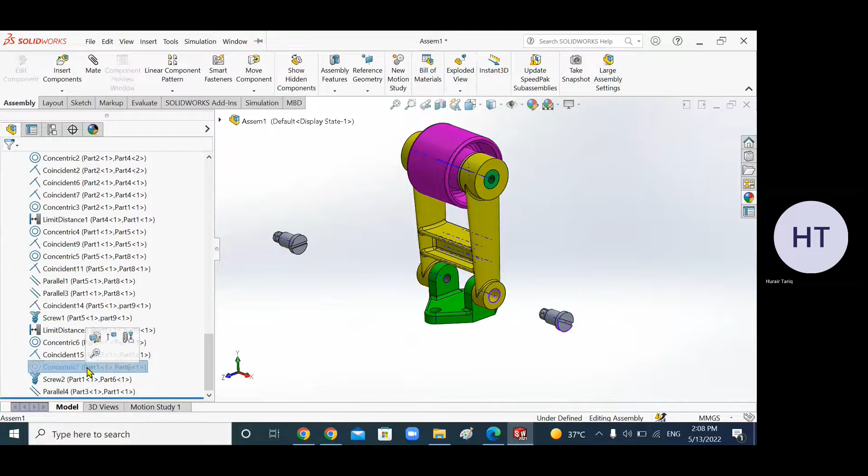Is it suppressed? Yes, concentric. But even then there is a screw mate in between - let's suppress the screw mate as well, because of the screw mate it's not going inside. Suppress the screw mate. Now it's clear you can move it close, so that you will have to do less work.

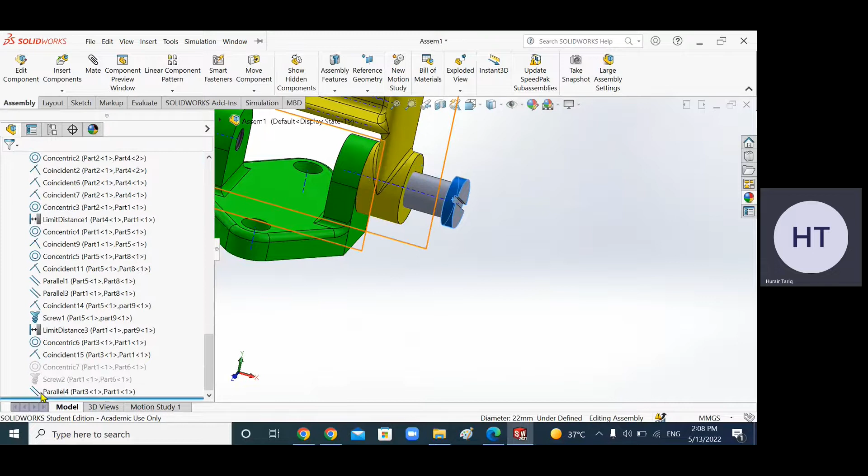Sometimes SolidWorks makes trouble. Make it close so that I will then have to do less work. Now unsuppress this concentric - maybe you do not need this concentric when you are making the screw mate. Anyway, adding an extra mate is not going to affect anything. Unsuppress this one too. When you unsuppress, now you can see it's going inside easily. So there it is, you can see now.

Now let's save the document. File, save as, tightener assembly. Save it. So we have got this.

Now I don't know what has happened - it has hanged actually, it's not working. Where is it? It's not working, I don't know what has happened. Okay, there it is.

Now what I can do is look at this - this is going inside again, so I have to apply a distance mate. You can apply a distance mate, or you can just fix it. You can apply a distance mate if you want. My mouse is not working - I don't know what has happened to it.

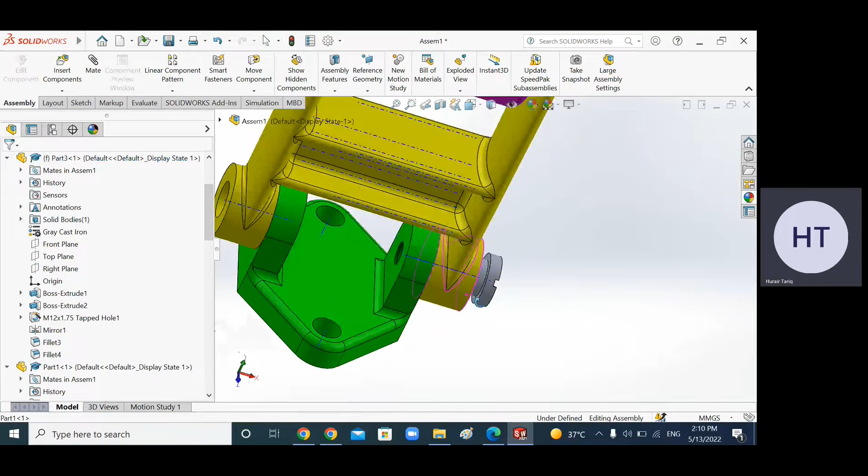Similarly, in the same way, you can apply the distance mate if you want, between the two. So go to the mate, click on this advanced mate and click on this distance. The minimum is going to be 0 millimeter between the two surfaces, and the maximum is going to be how much?

Let's come here, and you can choose any value anyways. This is 38, this is 5, and this is 20, so we know that it's going to come out. The thread length is actually 30... thread length is 13. So you can choose like 13. 13 is okay, so choose 13.

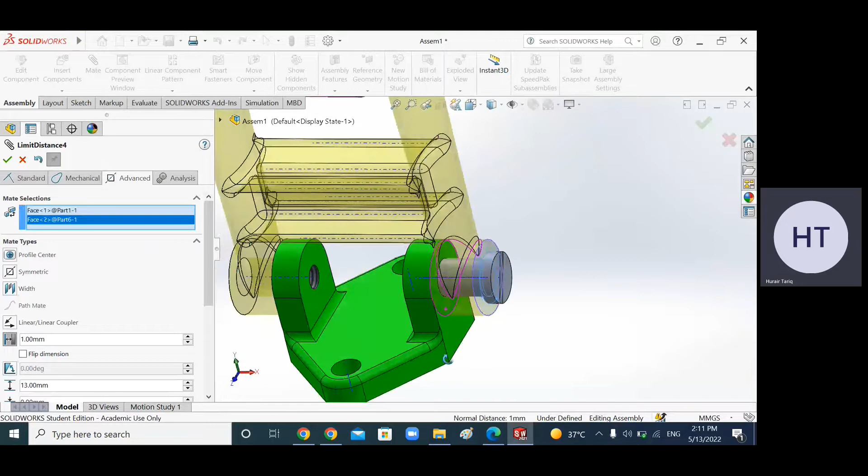And select the two surfaces. The first surface is this one, face 1, and the second surface is this one. I am unable to use my mouse wheel for some reason, but I have selected the two surfaces, and you can make it.

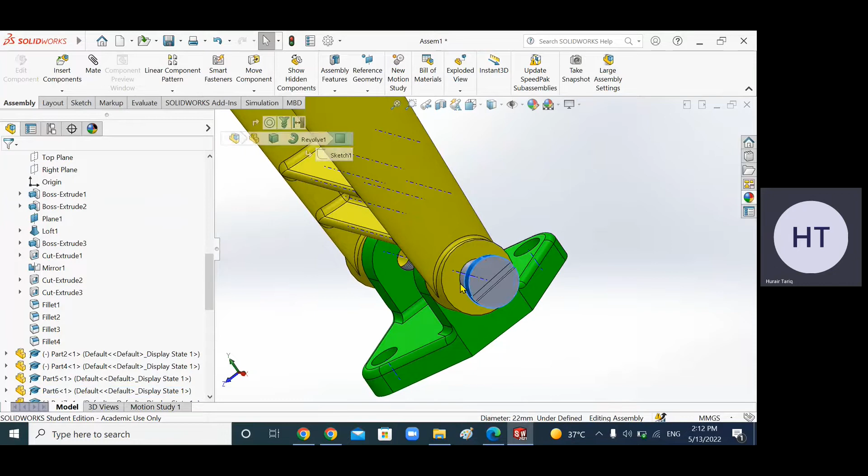Now, if you rotate this direction, you can see that it's not going inside. But if you rotate in the other direction, now it opens till this point, and after that it's not going up. It's not that this is not coming out because this 13 millimeter limit has been achieved, as you can see from here as well. When you have achieved this 13 millimeter limit, it's not coming out.

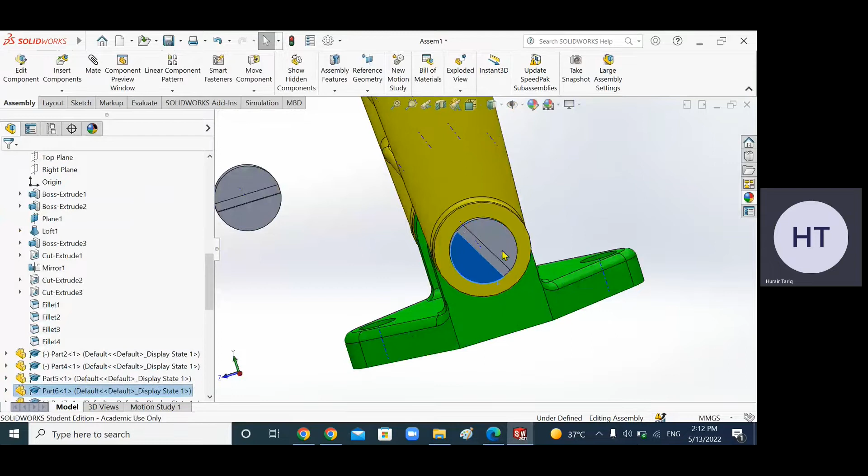So now this one is done. You are going to make this mate, the screw mate. This is done. This mate is made.

Now what is the last one? We need another mate. First go to mate and select this axis and the axis over here, and make it coincident and flip it. Actually flip the alignment - the alignment is not correct, so you flip the alignment. Now the alignment is okay. Click OK. Now move this one close, otherwise it's going to make trouble.

Now what is the next mate? Advanced mate, no, mechanical mate - that's the screw mate we have to select. And we have to select again the two axes. This is the first axis and this is the second axis. We make sure that the axes are there and something else is not selected - you have to be very careful about this. And this is actually 1.75. Now click OK.

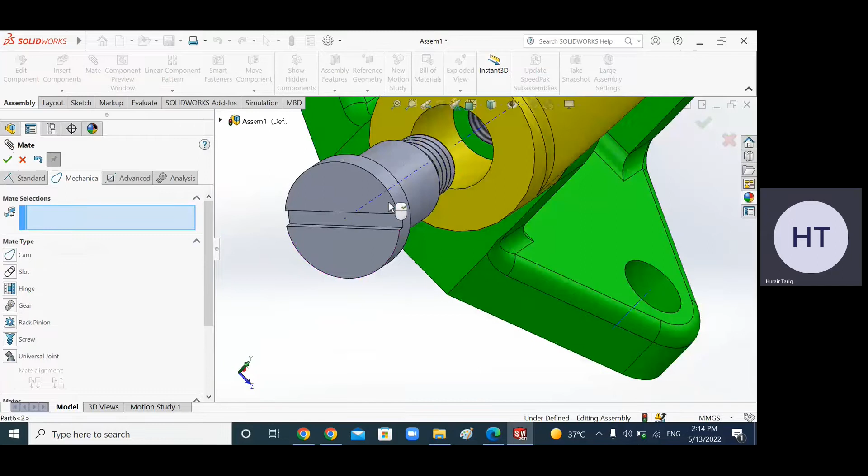The mate is actually there, so you can see that there is a mate. Now again, the mouse is working. So now what we have to do, the mate is there, you can see.

Now we have to apply the distance mate. We did this for the previous 0 and 13. This is 0 and this one is 13. And the surfaces are actually this one and this one, so there is a 0 millimeter and a 13 millimeter. Click OK, and you can see that it's not going to go beyond 0.

It's not going to go beyond 0. If I try to move it, it's not going beyond 0. You can click on this one and it's not going. So there it is.

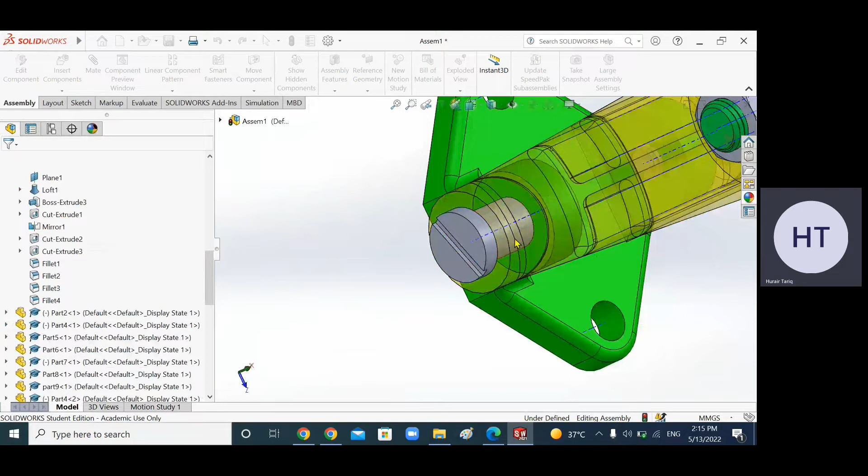This is the assembly, and you can make the isometric view - this is the assembly. You can add the materials by looking at this table. So CI stands for cast iron, this is phosphor bronze. Wherever the material is given, you can just add the material. This is the assembly.

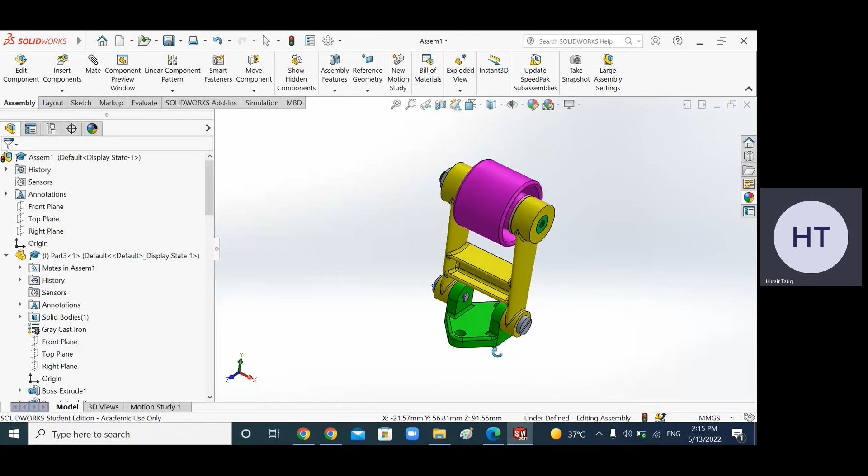And you can hide it, you can hide the axis now. There are no more axes visible. You can see how it looks in the front view - this is the front, this is the right, and this one is the top view.

Now I am going to solve the other question. This was actually the assembly part, so the second part was to make a 3D assembly file. So we did part number 2. Now part number 3 will be done in a separate video. Parts 3, 4, 5, 6 will be done in a separate video. Thank you.